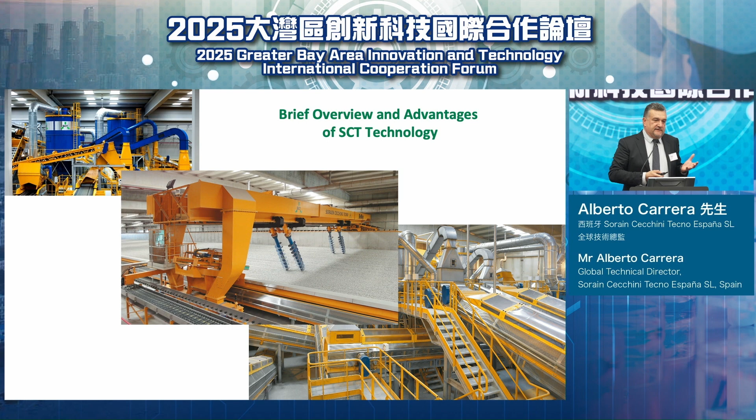Let's see a little overview. I don't want to bore you a lot on that, because I'm sure there will be many other occasions to talk about the advantages of the technology. As you can see, all the technology is fully automatic. It's an important part of the technology. When you have large quantities, if you don't go automatic, you're dead. There's no other way to go when you're dealing with city waste.

These are details. Sometimes you imagine that in waste treatment there are big inventions that can change the treatment. Maybe there will be, but till now waste treatment is done also by good engineering, detailed engineering, starting from the receiving of the material. You need a smart receiving, in order to be clean, not to have issues that increase the quantity of leachate. You have a big problem in China with leachate, because you have a lot of moisture content in your waste, and you need to deal with it.

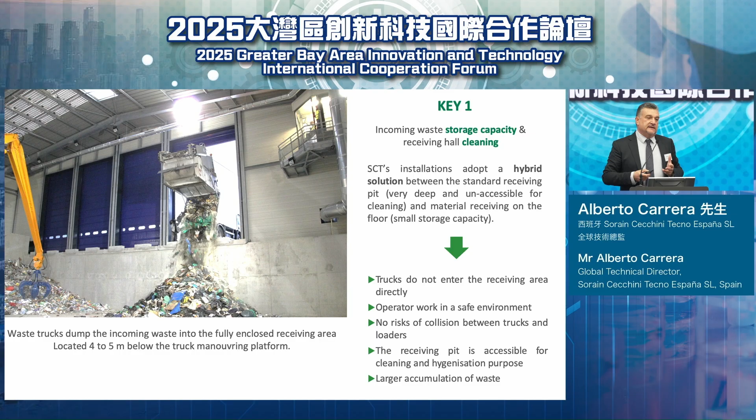If you leave all this material in the pit - I went a few years ago, in 2006, to Shanghai, in Pudong, to see the incineration plant, and they were treating 1,000 tons per day. That's a large plant, and they were producing 200 tons per day of leachate. Why? Because the pressure of all the material, 8 meters high, was squeezing the waste at the bottom, and they were pumping this leachate all the time, because if the organic matter stays more than 2 days in a pit, the organic cells break down and release water. So they were pumping constantly. This is a big problem, because of course you cannot burn water, and at the same time you need to treat that water. So making the proper receiving pit is dramatically important, especially in a country like China.

Another little detail, a key that makes a plant run properly or not - we have a feeding from an electric grapple. This electric grapple is capable - it's very little, not a huge grapple where you can't select anything and you throw everything into the oven, and the oven doesn't really care. But if you have to do proper treatment, you need to be like the mother eagle that goes little by little, giving the food to the little bird.

And this is the same thing - you have a little hand, well, it's a big hand, but it's 1 cubic meter that is feeding the line. At the same time, you can see the material in that area - these are the bulky waste that it's able to select at the end. The operator, this man here, in a remote, air-conditioned area, can select all this material.

For a city, it's very important because unfortunately people think the waste is only the little bag that arrives on the receiving platform. Wrong. Because people, whenever they have the chance to throw things in the garbage, throw things in the garbage. You can find whatever - I'm sure Hong Kong is the same, not different from all the other cities I know.

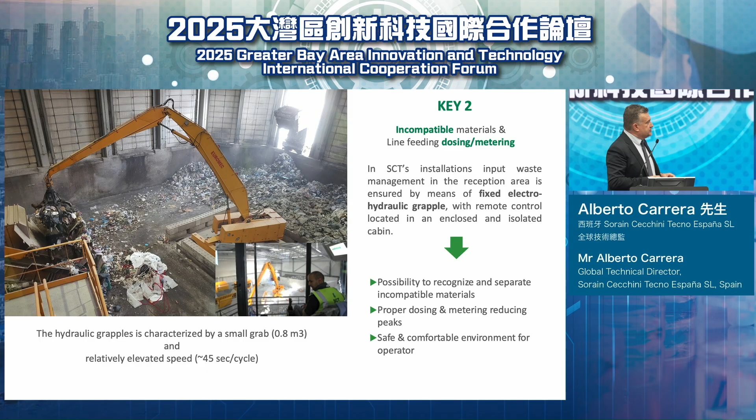So you need a certain detail in having such a system. It's quite unique - you might imagine it's normal, but it's not, because mostly you have a flat slab or a pit. This is a hybrid solution which works very well, and we have several all over Europe.

Another important thing on waste is trying to eliminate undesirable materials. So you need to suck - our equipment sucks the air, with the air, all the waste, to let down all the undesirable material. If you have to do any shredding or separation activity and you don't provide a wind separator, you have a lot of trouble in shredding because you have a lot of undesirable material inside.

We discovered this in Rome, for instance. We had a huge problem with washing machine motors. Why would a washing machine motor enter into the waste stream? I don't know, but you find it inside.

Now, you know what is the biggest problem with waste today? Just to give you an idea, with the system you should eliminate batteries. We talked yesterday about how batteries are produced. Nowadays, in the waste, the main problem is batteries. And you know why they are a problem? Because when a battery is hit by a shredder or feeding equipment, most of them catch fire. So there are a lot of fire problems in modern waste.

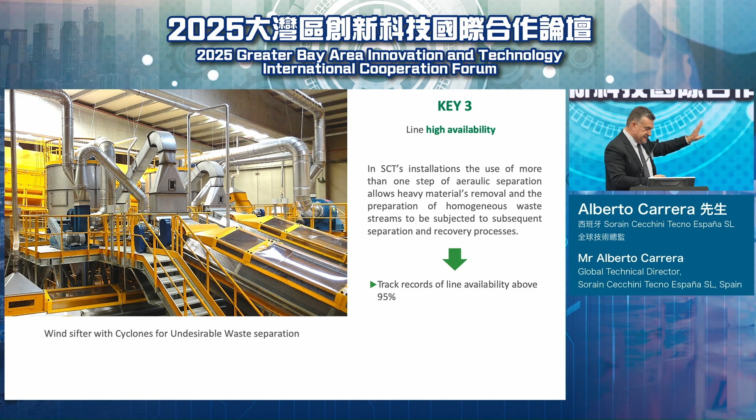Why? Because people throw in milling machines, little electrodomestics, whatever you can imagine - the monopattino, all these kinds of batteries are a problem. Even sometimes the telephone one. So with this system, we eliminate all these materials.

And then you have a combination of technology - optical sorting, shredding, differential shredding, trommeling, etc. I don't want to give a lesson on how you separate waste, I don't think it's worth it, but just understand that a plant treating waste is a complex plant. It's not an easy plant. The important thing is combining all this machinery in the proper way.

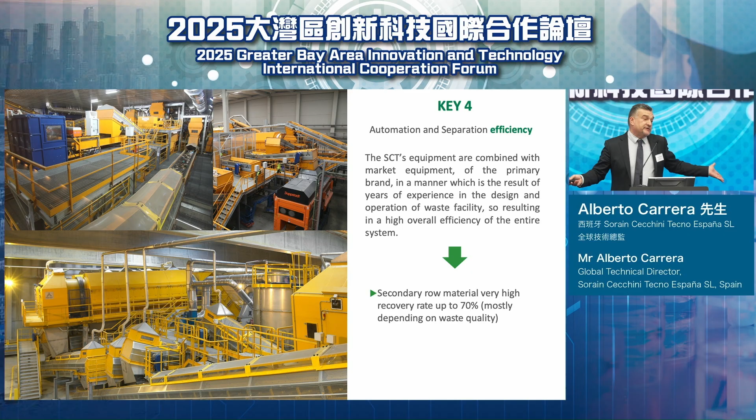You might imagine one machine does the work - it doesn't. The work is done by the proper combination of machinery properly designed. That's why you need experience. It's not that I've invented a machine, you put the waste in, and outside you have the results. That doesn't exist - unfortunately, maybe in the future it may exist.

I'm always long, but I'm Italian, so I think I'm excused because we are known to be always late.

The real key of the technology is this machine, called the Biomax. Why is it so interesting as a machine, you will say? It looks like a big industrial pasta-matic, turning whatever you put inside. Well, more or less it's a pasta-matic - a giant pasta-matic of 80 tons.

But it has a very good characteristic, especially dealing with organic waste, which makes - I think there are only 2 or 3 companies in the world dealing with organic waste on large quantity - and this is one of the systems used worldwide when treating this big quantity of waste.

It's a little bit academic data, I'm sure it's also a bit boring. But the concept is that you have an automatic system where the material enters and is turned constantly. You have a constant suction of air from the bottom to maintain the temperature, because you want the aerobic transformation of the material through continuous sucking, turning, and adding of water.

You are basically replicating nature - you're not doing any miracles. The treatment of garbage is not a miracle, it's good industry applied with detail. What you want is for this material to be transformed constantly, very accelerated - you want the biological process to...

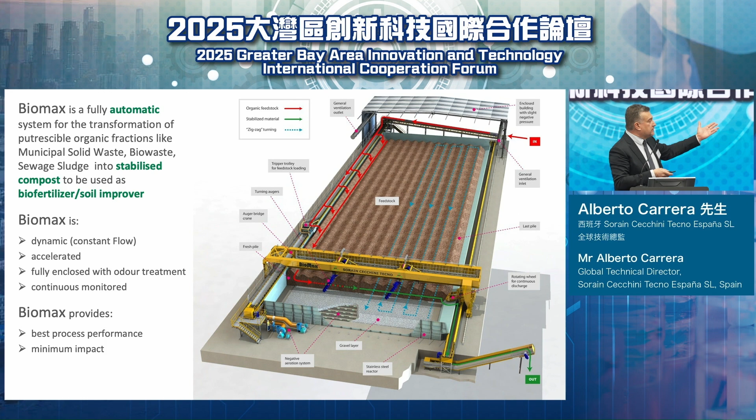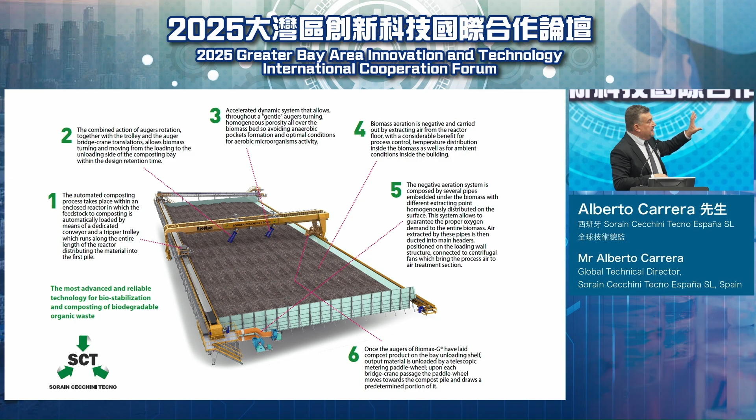There are other characteristics of the system. It's a fully controlled, automatic process with monitoring. Let me show you more or less how it works. You have the system, which is the input feeding this big swimming pool every day, constantly. Then you have the machinery starting the other way to make space for the new material coming in and downloading the old material.

So what happens is the material little by little transforms, becoming from red to green, hygienizing, because I want to control the temperature to make sure there are no pathogens. Another important thing in waste dealing is hygienization.

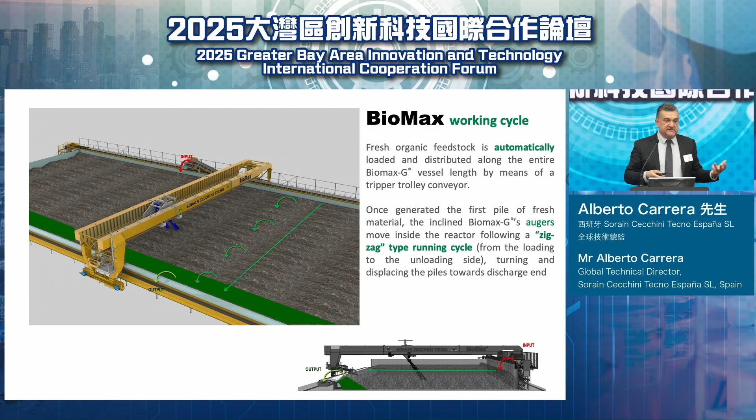We know perfectly what's the problem regarding diseases, and waste unfortunately brings diseases. Not because we are putting diseases in the waste, but because waste, through an uncontrolled biological process, develops pathogens in general, not only good microbes. So you need to treat it, and to treat it you need to control it - turning it constantly, adding water, sucking the water and air constantly. This is the biomonitoring that we do on the machinery.

We were talking during these days about artificial intelligence, and I remember Patrick was telling one important thing: to do artificial intelligence, you need a database. In waste treatment, most processes are semi-automatic, and therefore the collection of data is a little bit difficult because of the manual part.

In this specific technology, all is automatic, so you can collect all the information without exaggerating. We don't have 3,000 sensors like a line of batteries, because we need waterproof, dustproof equipment, so there's a lot of constraint on the sensors. But you can have a certain number of sensors, so we can collect a lot of data.

This is our portal where you can see all the data from your mobile. At the same time, we are trying to understand more how to apply artificial intelligence. Because with all this data, the system is capable of controlling the biological process better, to reduce even the time, and to make the results repeatable every time. I think there are not many technologies on the market for domestic waste that can provide that result.

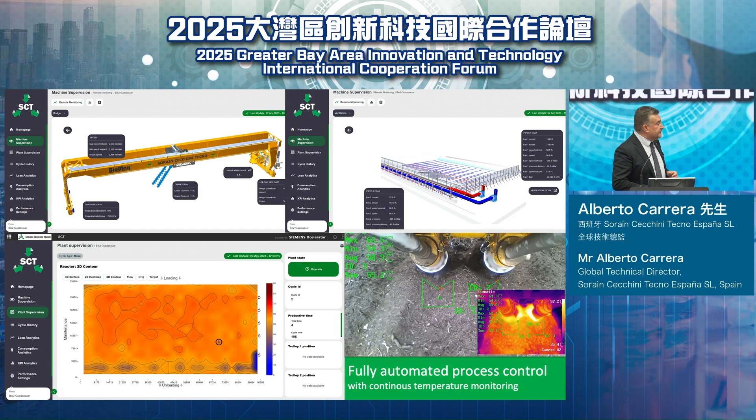A little video - hope you're not too bored, but I'm more or less okay with the time. Just to show how it works, you see here you have the free space, and the free space moves in that direction. See? It's moving. We are basically displacing a hole. We start from the back, download the ready material, and move the space in front, just to let more space available for new material entering. This is dynamic, continuous.

It looks quite logical, not a real invention. But believe me, when you're dealing with hundreds and hundreds of tons every day, to have a system like that makes life for the treatment much, much easier, because you have the chance to have perfect control of the process. Okay, I think it's enough.

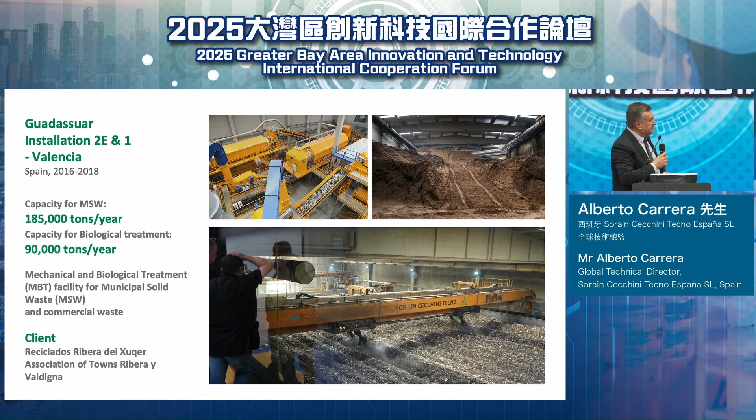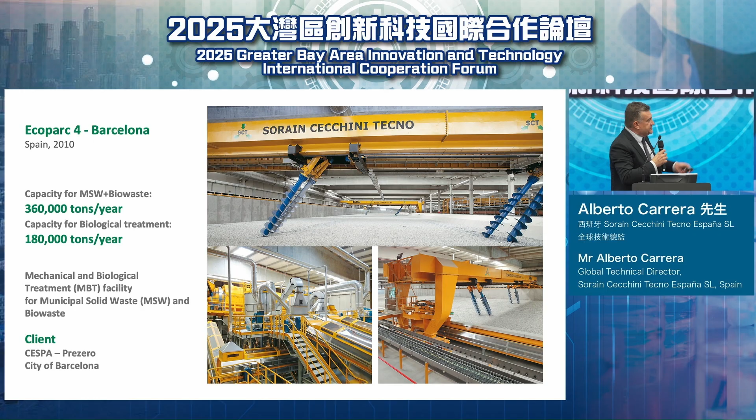This is the plant of our mayor, which is Guadassuar, that you have seen yesterday in the video. And this is Barcelona - who does not know Barcelona? Everyone knows Barcelona. This is a nice plant in the mountains, treating one of the biggest volumes in Spain.

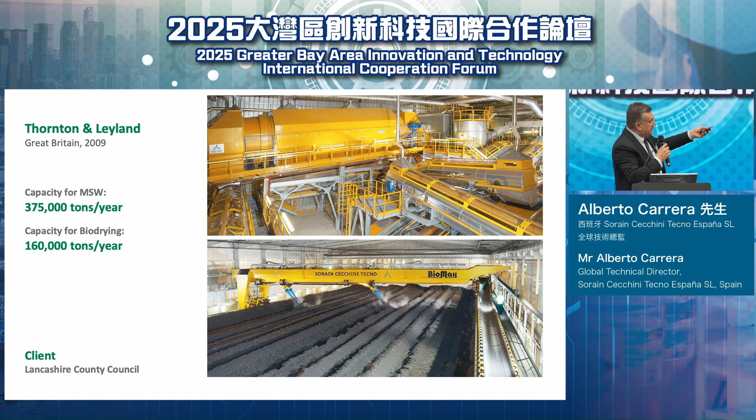Thank you for the attention, and I hope we can provide more information in the future for this city and all the other cities in China. Thanks. Okay, once again, thank you.